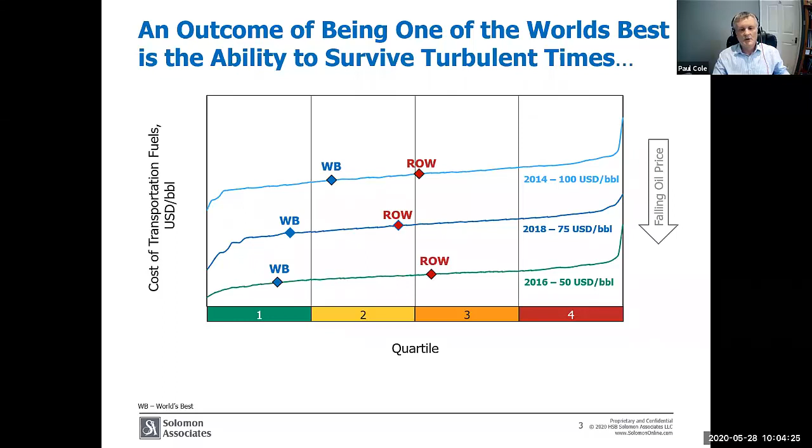History has proven that times of crisis drives innovative thinking. World's best refineries have studied the lessons of the past. They understand how to be competitive when margins are depressed. They understand that the control of costs is really important. And we know from their investments that they do not stop spending in the areas that matter the most to the long-term growth. All good operators realize that the control of costs is more than just how much you spend, but more importantly, what you're spending it on.

The presentation today is a very short summary of a much larger piece of analysis that we've conducted on our database of over 330 refineries worldwide. The full presentation is available to all of our study participants for a very small fee. We can add your data to any of the slides and offer you insights on how you too can transition to be a world's best refinery.

In today's presentation, I will describe our selection criteria and why we believe this characterizes the world's best refinery. Then I will show you how the world's best perform against the rest of the world and explain what makes them different.

So first, to be considered a world's best refinery, you need to have top half performance in 4 key metrics. Operation availability is a measure of the reliability of your refinery. Return on investment is a measure of the economic performance of your site. Energy intensity index is a measure of the energy efficiency of your process units. And maintenance cost efficiency index is, of course, a measure of maintenance cost.

But it does not stop there. The world's best refineries need to sustain this performance over 3 studies, which is 6 years. In the end, we found only a small number of refineries met this criteria, and we selected 4 from North and South America, 4 from Europe, and 4 from Asia Pacific.

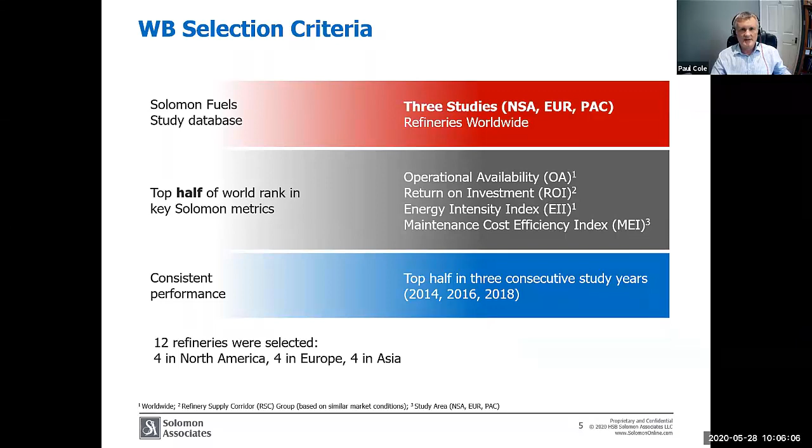This slide shows the quartile performance for 11 of our key Solomon metrics. Where you see 1 or green, this is first quartile. Where you see 2 or yellow, that is second quartile. You will also see 2 columns of data. On the left is the world's best peer group, and that is the 12 refineries that we've already discussed.

On the right is a world's best trend group, which is a slightly smaller subset of the 12 refineries - 10 of these refineries that have participated for 7 Solomon studies in a row. So that means 14 years. We will use this group later in a number of the trends.

In many metrics, both groups, the world's best and the world's best trend, are first and second quartile. The one exception is non-maintenance personnel. Later I will show that this is due to a small number of low-wage refineries with very high personnel numbers. When you remove these refineries, the remaining refineries, which is 10 in total, are close to first quartile performance.

The top of the table is our 4 primary selection criteria, so of course we expect them to be first and second quartile. But the remaining 7 metrics highlight that with the right strategy and enough time, you could be at or close to first quartile performance in many areas and sustain it.

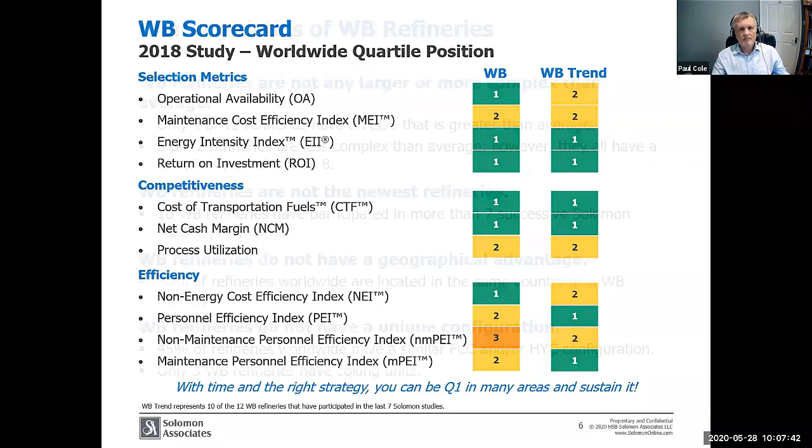At this stage, I'm sure many of you are listening to the webinar and believe that the refineries we've selected to be in the world's best peer group are special. They are not. In fact, many of the world's best refineries are just like any of the refineries each of you have worked at throughout your careers.

They are mostly FCC conversion refineries, and there are only 3 coking refineries in the selection. Size and complexity does not matter. 4 out of the 12 world's best refineries have less equivalent distillation capacity than the average of the rest of the world. Location doesn't matter. 50% of the refineries worldwide are in the same country as the world's best refinery.

And as I mentioned in the previous slide, age doesn't matter. We've got 10 of the world's best refineries that are over 14 years old. So this is pretty disappointing so far. You've attended this webinar to find out what is different about this group.

So let's now look at investment. Surely there's been a lot of recent investment at these refineries to make them the world's best. Well, sadly not. More than half of the refineries in the world's best peer group invest less than average. However, looking at the investments made by a refinery today does not explain why they are the world's best.

There is much more insight to be gained whenever you look at the story why. We notice, for example, that the world's best refineries invested much earlier in clean fuels than the rest of the world. World's best refineries have made the right investments at the right time in their history to ensure that the configuration of their refinery is a good economic fit for the current and future economic environments.

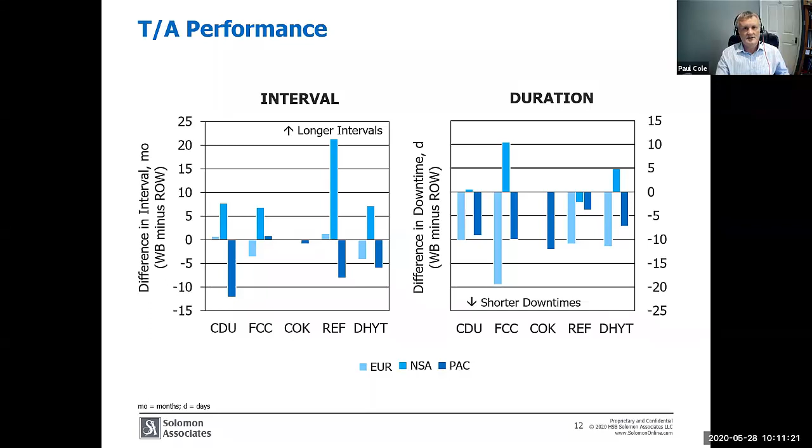Next we want to look at process utilization. Process utilization is extremely important for both economic performance, as measured by return on investment, and for energy efficiency. It is a function of two things: having the right design and configuration for your economic environment, and operating your refinery well, that is, good operational availability and making the right economic choices. World's best refineries have made the right investments at the right time to ensure their configuration is a good economic fit for current and future environments. We've also covered why world's best refineries have higher operational availability, so it's no surprise 7 out of 12 refineries have first quartile process utilization.

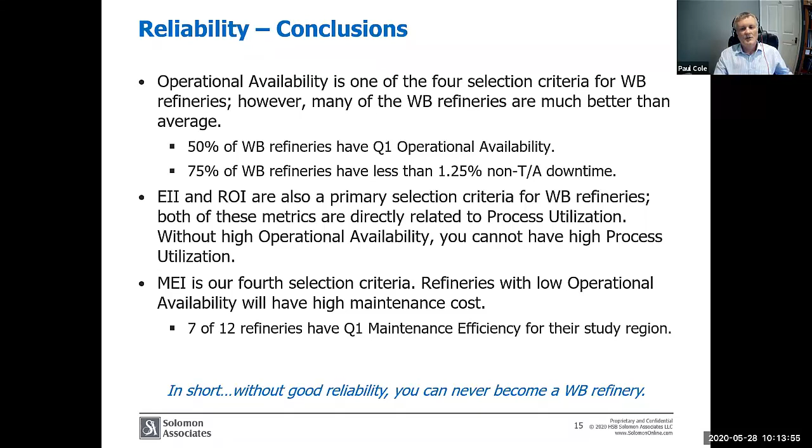I believe operational availability is the primary driver to becoming a world's best refinery. Without good reliability, you can never be the world's best. Without high reliability you will not have high process utilization, and that is crucial for both energy efficiency and return on investment. We haven't yet mentioned maintenance efficiency, one of our four selection criteria. Refineries with high operational availability will have low maintenance cost, because maintenance planning is proactive, not reactive. Because of this, the world's best peer group entered 2020 in a much better position to survive this downturn and operate with reduced resources on site.

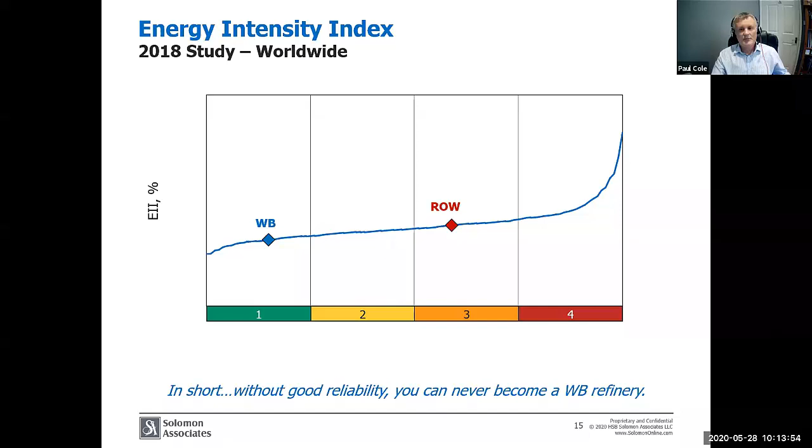Many companies in the world today are actively looking to reduce carbon emissions. One of the best ways to do this is to improve energy efficiency. EII, or Energy Intensity Index, is Solomon's proprietary metric to measure energy efficiency and is one of the leading metrics used by companies and government agencies throughout the world. It's a primary selection criteria, so again we expect the blue diamond somewhere in the first and second quartile. However, just like operational availability, more than half of the refineries in the world's best are first quartile.

It's been Solomon's observation that many refineries don't always recognize the impact excess energy consumption has on non-energy costs, such as maintenance personnel and chemicals. By not recognizing the true costs, many refineries underestimate the savings that could be realized through better energy efficiency, making it difficult to economically justify energy improvement projects. Improvements in energy efficiency can be made without large investments if energy upgrades are integrated into the life cycle management plans for each of your assets.

There are many interesting observations for energy intensity index in the world's best analysis, and there's a lot of insight we can share if interested, though we can't cover it all today. World's best refineries did have a head start, they were already more energy efficient than the rest of the world at the start of the trend period. However, the world's best peer group is reducing energy intensity index at a much faster rate than the rest of the world average. 7 out of 12 world's best refineries have reduced EII by more than the rest of the world since 2012.

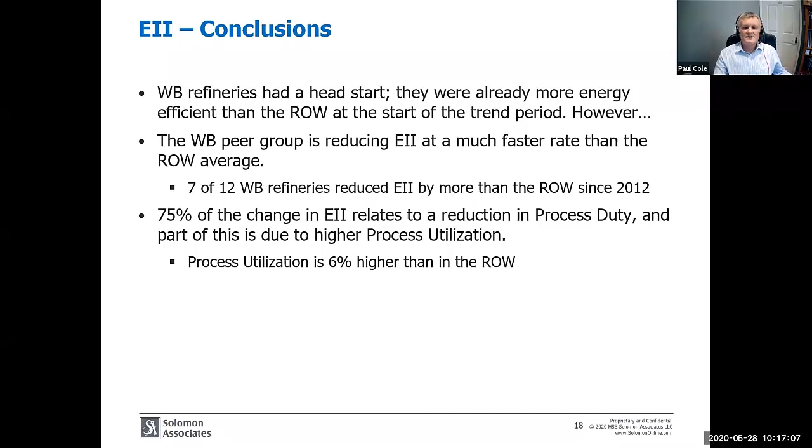75% of the change in energy intensity index relates to a reduction in process duty, the energy consumed to heat oil products in refinery furnaces. Process duty can be reduced through good heat integration, linked to both equipment design and process utilization. Process utilization is 6% higher than the rest of the world, and world's best refineries invest to improve equipment design, reducing energy consumption. Over 50% of the world's best trend group have invested more than twice the rest of the world average at some point since 2006. They also have higher heater efficiency, more of their electricity is self-produced, and they make a lot less steam through burning fuel.

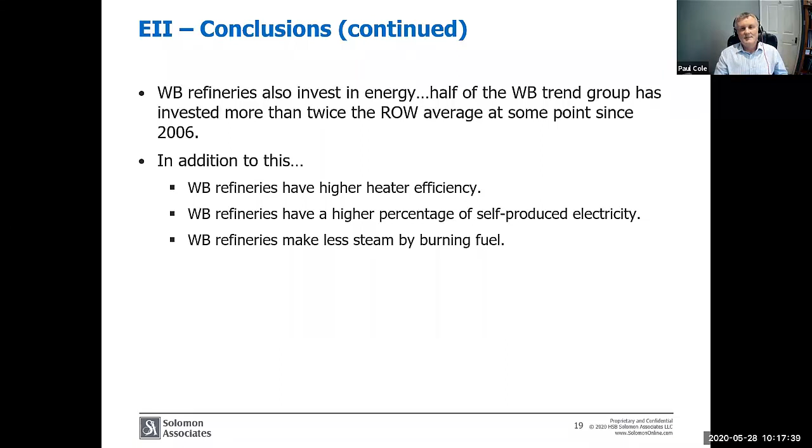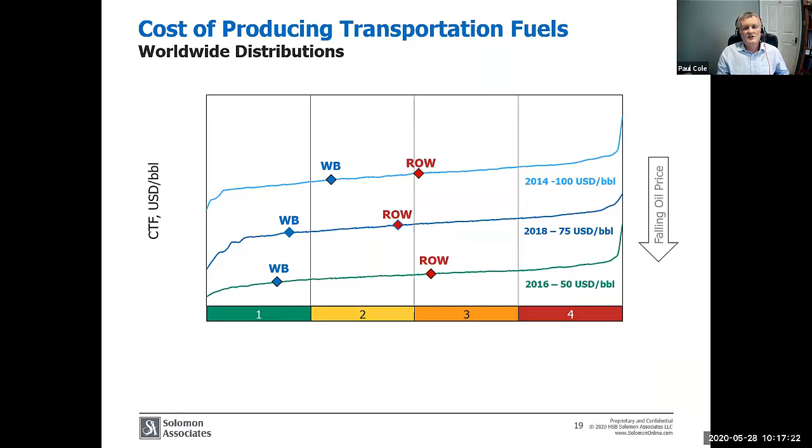I trust by now that you appreciate why the control of costs through reliable operations is so important. I'd like now to talk a little bit more about these byproducts and how this too can help the long-term survivability of your site.

Byproducts can be high value, such as chemical products or gasoline components, and that will reduce the cost of transportation fuels. Or byproducts can be low value, such as fuel oil, and that will increase the cost of transportation fuels. Our world's best refineries produce less fuel oil and less heavy intermediates, and they produce more chemical products compared to the rest of the world.

One would assume that the world's best refineries produce less fuel oil by design. However, only 3 of the 12 refineries have got coking. There is also a wide range of crude types and qualities processed by each refinery. I'm sure that both of these factors will play a role in reducing fuel oil, but they do not distinguish the performance of the group.

The only thing that I can say for certain is that all world's best refineries have got high reliability and they have got good economic optimization, which will definitely help to minimize fuel oil production.

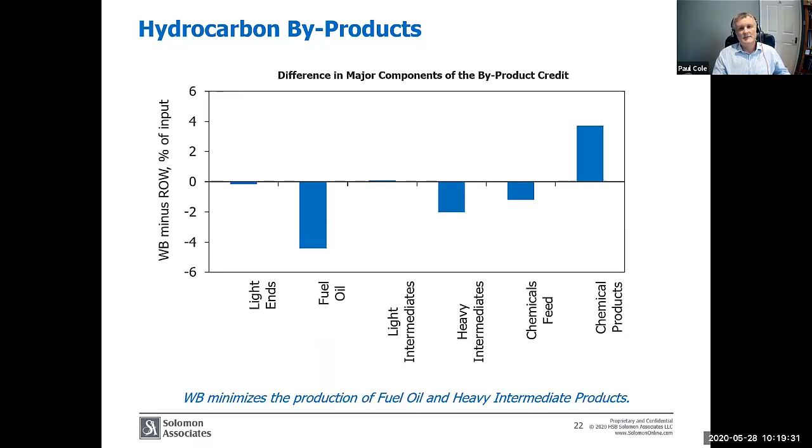Non-energy operating costs were not a primary selection criteria, but just as we've seen in many areas, the world's best peer group is again first quartile in this metric. In fact, 7 out of 12 world's best refineries have first quartile non-energy cash efficiency index in their respective regions.

To a large extent, this is driven by maintenance cost, but non-maintenance personnel should also be considered. At a high level, the world's best peer group appears to have average personnel numbers. They're sitting there between the second and third quartile breakpoint. And this position would be perfectly acceptable to many operators seeking to improve their competitive performance.

However, if you filter out the refineries that have got really low wages and can afford to operate with increased numbers of personnel, there's a very different message. 10 of the 12 refineries in the world's best peer group have high wages, and more than half of these 10 refineries have got first quartile non-maintenance personnel.

In other pieces of analysis that I've done for Solomon, I've discovered that a snapshot in time can be misleading. This only tells you what is happening now or what you can hope to achieve. There's a much more interesting story when you seek to understand why.

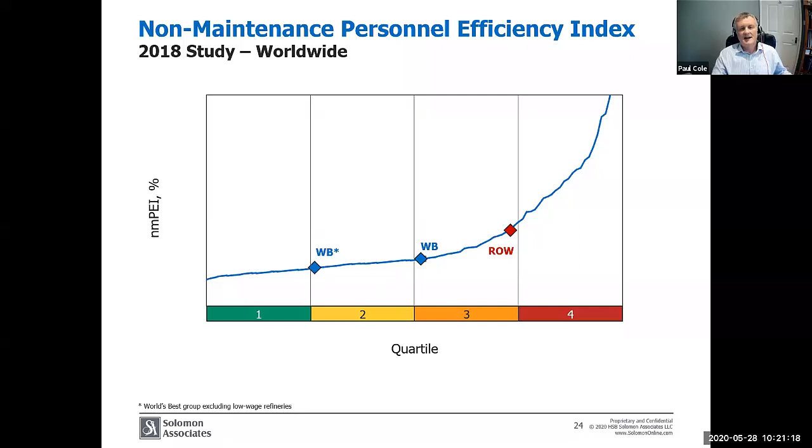World's best refineries don't start out seeking to have first quartile personnel. They arrive at this position after persevering for many years to change their culture and become highly reliable and an efficient operator.

So in conclusion, what does it take to be a world's best refinery? Well, first of all, it is not size. World's best refineries are not different. They cover a range of size, complexity, and configuration.

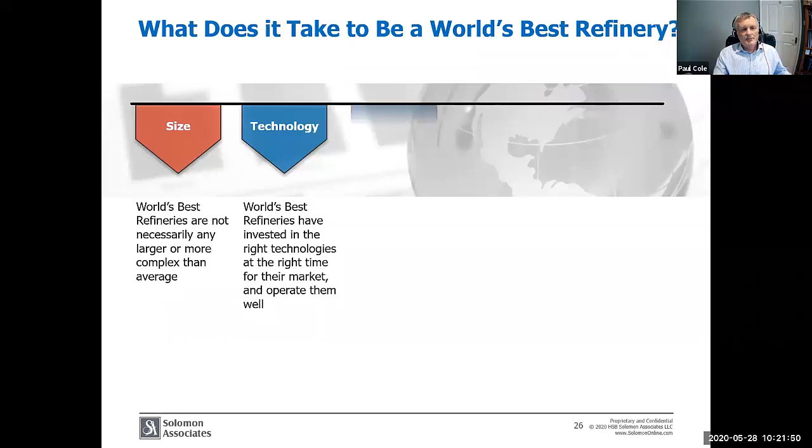Could it be technology? Well, world's best refineries have invested in the right technologies at the right time for their market, and they operate them well. But the primary characteristic that differentiates world's best refineries from the rest of the world is reliability. Reliability improves gross margin. It improves energy efficiency, and it reduces maintenance cost.

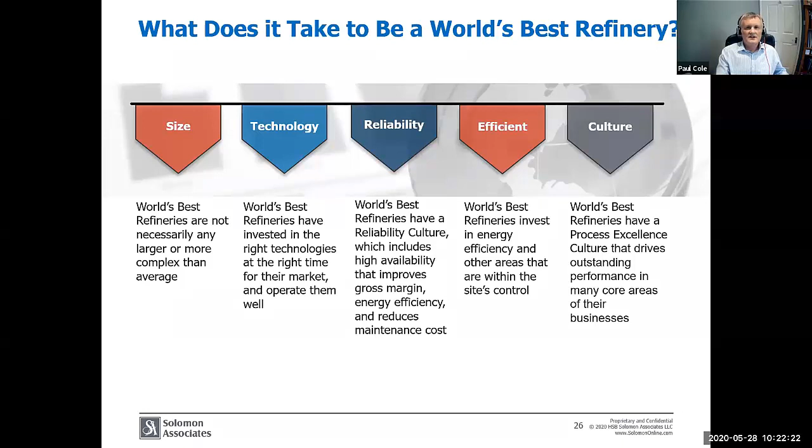World's best refineries are also efficient. They invest in energy efficiency and other areas that are within the site's control. And last but not least, there's culture. Culture is the glue that holds everything together. World's best refineries have a culture that drives outstanding performance in many core areas of their business. World's best refineries are relentless. They never give up on continuous improvement.

So as we look to the future and the 2020 Solomon study, we believe that this will be an unprecedented learning event. It will be fascinating to see how our world's best refineries respond to world events. This will provide real insights on how they've managed their way through turbulent times. It is for this very reason why benchmarking in good times as well as bad is so crucial for performance improvement.